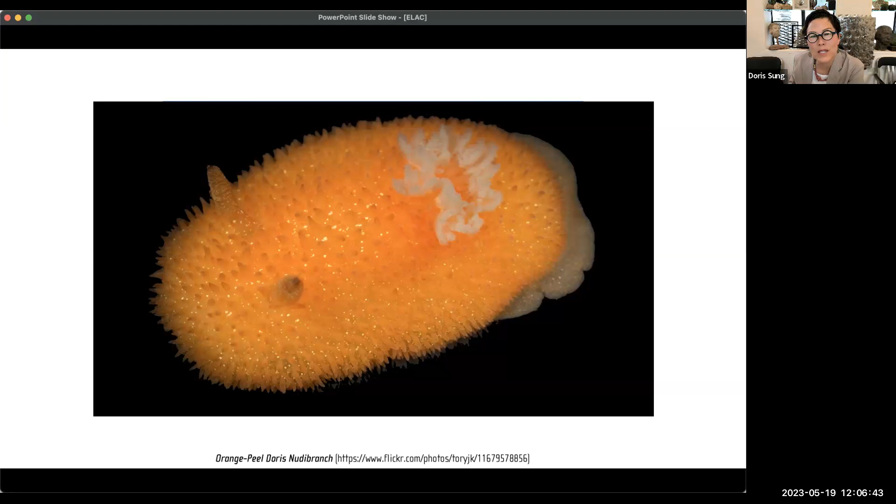So when I was in college, I actually was a biology major. I was very interested in the math and sciences. Enjoyed doing all that kind of stuff about plants and animals and behavior. I also liked to do the arts, and I wanted to be an art major in college, but my father said absolutely not, you cannot do that.

I started to move forward, went to graduate school, started to get really interested. Again, let me back up for a moment. I was going to go to medical school. That was why I was in the sciences. And it was in undergrad that I started to get exposed to architecture and other things. And that's when I decided to change direction and start to look at architecture, because it, in some ways in my mind, was the combination of math, science, and art.

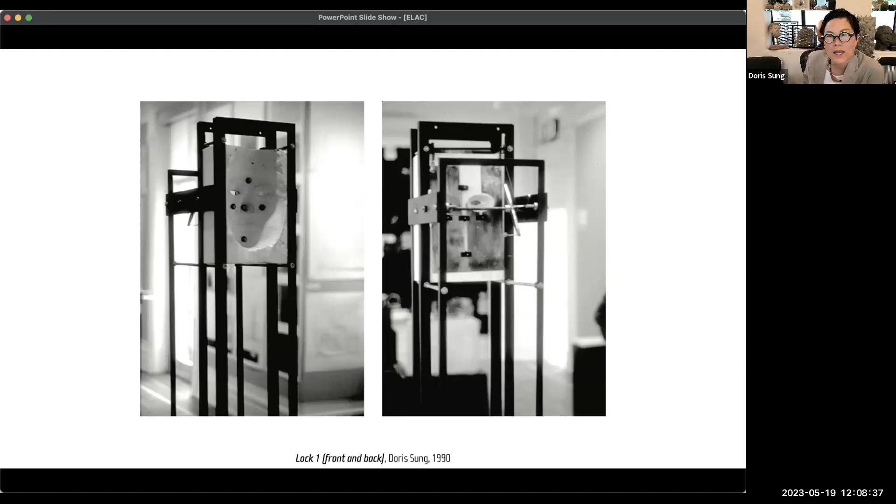And you can actually feel things and sensation through it. And so these are the things that I start to get infatuated with, because architecture too, being made out of inanimate material, should also be that sensitive. So I started to make these objects that try to transfer and understand body movement and material and sensitivity through grad school. And then even after grad school, started to continue to look at the biomorphic, bio-inspired designs. This actually was one that the eyes would flick open and closed and obviously mimic eyelids and that kind of movement.

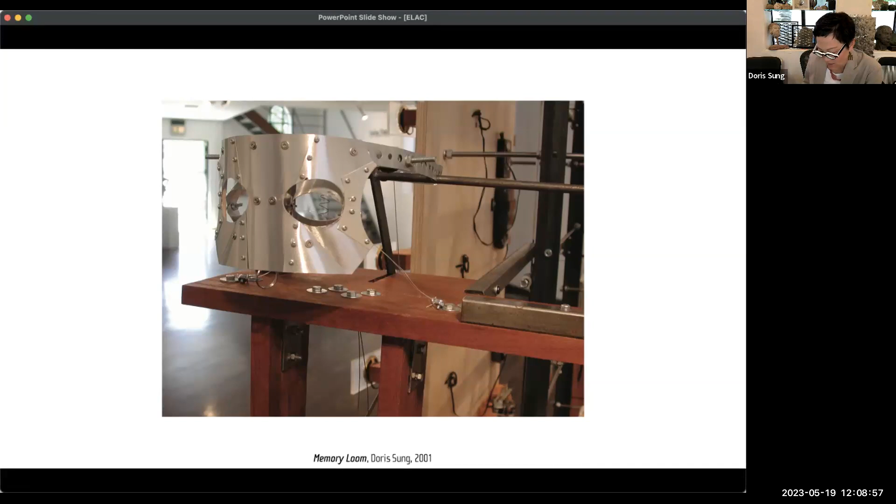I really started to be interested in Maurice Merleau-Ponty's work, The Phenomenology of Perception. He talked a lot about how the experience of absorbing inanimate objects into your body happens not through thinking about it intellectually, but through the experience itself.

He spoke specifically about a blind person's cane, and how through it you can feel texture, depth, and all kinds of things. It becomes absorbed into the body, so much that they're able to feel all kinds of things through the cane.

Over time, you also see things like the infamous Oscar Pistorius, who used blades to run, moving beyond a simple fiberglass stick to something high performing. So much so that other runners with feet thought it was an unfair advantage. So the question is, it's not just a matter of low-level activity for this material, it can actually be at a very high level.

Beyond the material itself is the space around you, that understanding of the bubble. As anyone who drives knows, there's a certain understanding outside your car of what that depth is and how to move your vehicle, maybe less so now with cameras, but prior to that, this is what started to understand that space outside. So can we understand that space outside of architecture as well?

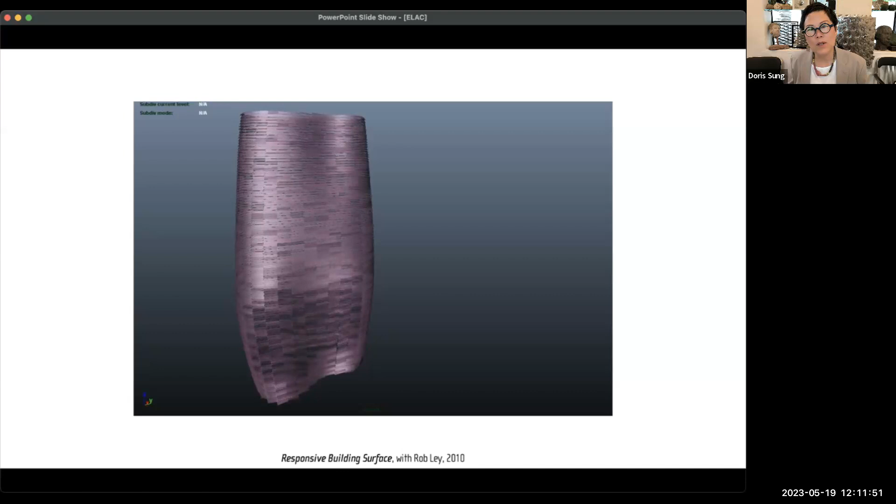So ultimately, I thought architecture should do this too, that it should be responsive to what's going on, especially the environment that is changing all day long. If it's responding properly, the facade on the outside would change depending on where it is. Higher up in the building, you'd have higher winds and different temperatures. Lower, it may change because of cloud coverage or trees blocking it. The change should actually happen throughout the day.

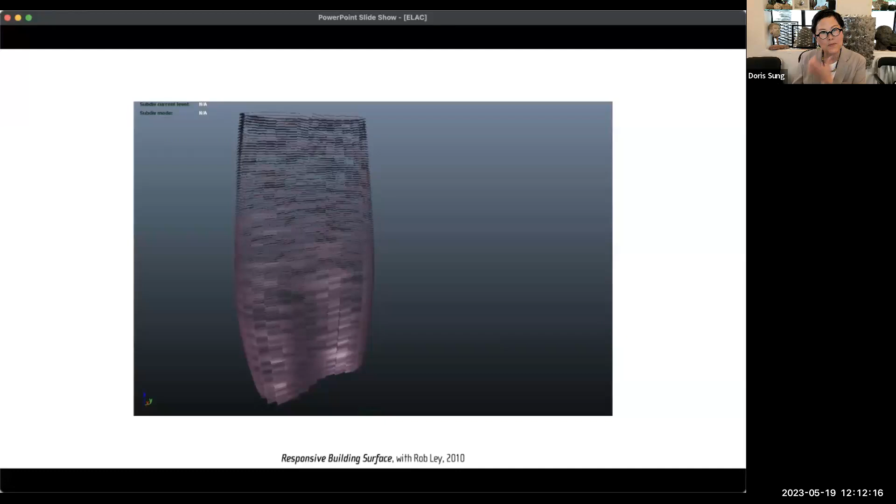At the same time, I became very infatuated with climate change. Elizabeth Kolbert wrote a book on catastrophe and climate change and how it was nearing. She started these essays probably around the year 2000, earlier than the publication of the book, and it really impacted me quite a bit, making me think about how we as architects really have to think about how our buildings are going to adapt.

The quick history: long ago, our buildings had thick walls and small windows. It worked quite well because they worked as insulators. So when it was cold outside, the inside was warm, and vice versa.

And because the windows were so small, it minimized that kind of heat or cold transfer through those surfaces. Moving forward very fast, we have the invention of plate glass and long-spanning steel, and suddenly that heat could come in very quickly and easily, not only through the material of glass, but also through radiation by the sun just coming through. Therefore, we had to invent air conditioning, and air conditioning over time has grown so tremendously that in order for it to perform efficiently, we have to seal off the building.

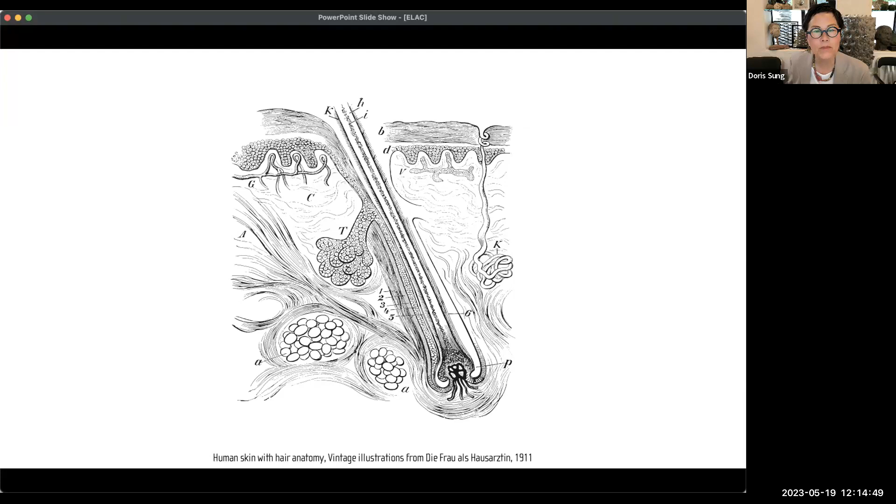I started to then look at smart materials, thinking that if we're going to make something responsive, we have to start with materials that are responsive in itself. Smart materials, different than the use of 'smart' in itself, is actually something that responds to changing conditions in their surroundings, and it requires no energy and no controls. This is obviously very different from what we call smartphones, which is the absolute opposite. But the engineering term for smart actually is this.

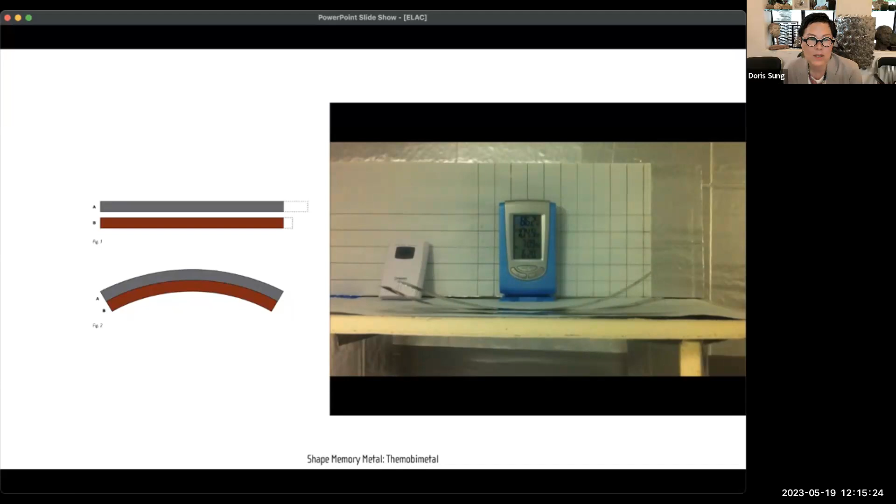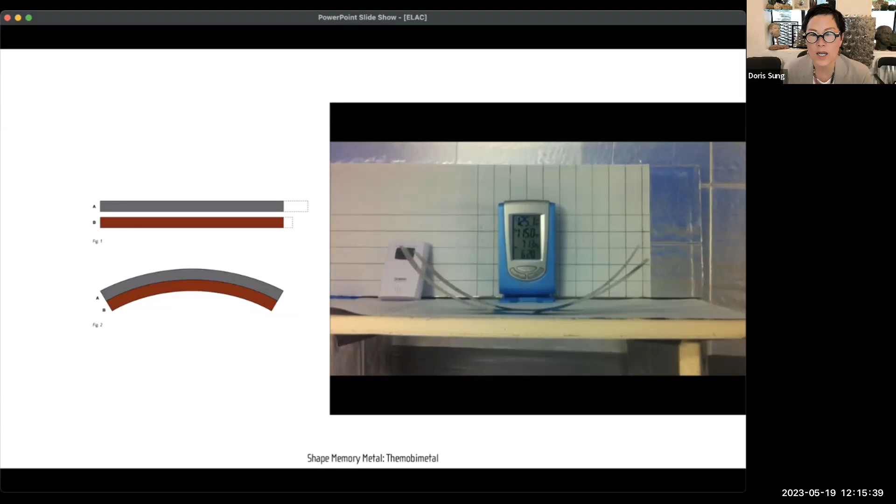And the material that I came upon was thermal bimetal. Thermal bimetal is a material that actually has two different alloys of metal laminated together, and when the temperature goes up, one side expands more than the other—so it has different coefficients of expansion. It will go back and forth millions of times, mainly because they're molecularly bonded together.

So what I'm going to do now is show you some of the projects I've done using that material, and then some of my more recent work at the very end.

As I told you before, my interest in climate and how architecture needs to respond to different things falls into different categories of its operation architecturally. In this case, it's ventilating surfaces—how do you make surfaces so that hot air can actually escape?

This is the first project, from 2009, where we tested the material. The material had never been used in a surface-like condition before. At that time too, I was really consumed with looking at how to make a design from beginning to end using computation.

So the computation was part of the fabrication process. This one actually used a very heavy modeling tool called CATIA, which is the type that eventually became Digital Project for Frank Gehry's office. But in 2009, which I don't think of as that long ago, it took us about 16 hours to instantiate this model—to actually run the model so that the surface was populated by all the different pieces we wanted.

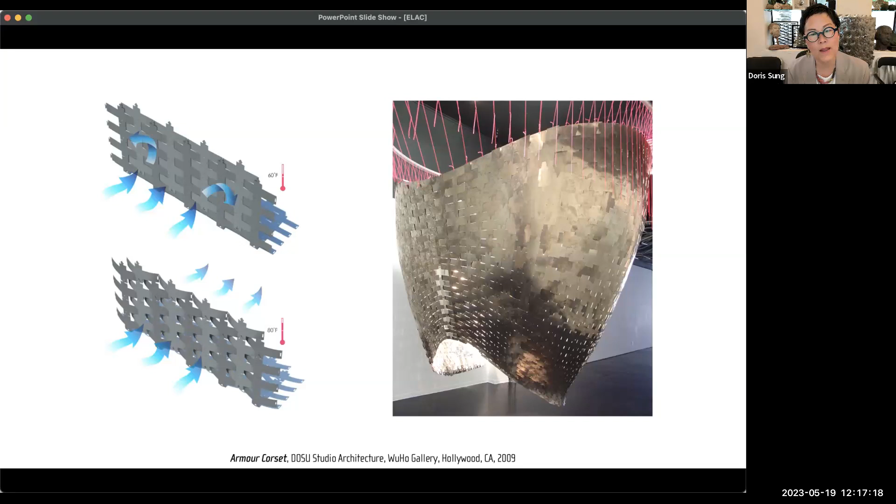Very slow, very heavy. Anyway, the idea was that as the temperature went up, the basket weave would crimp and allow air to actually pass through. We also eliminated any fasteners, trying to eliminate any kind of structure that would block the access of heat to the surface. And the result you can see is this kind of crimping of the surface as it heats up, and it returns when it cools down.

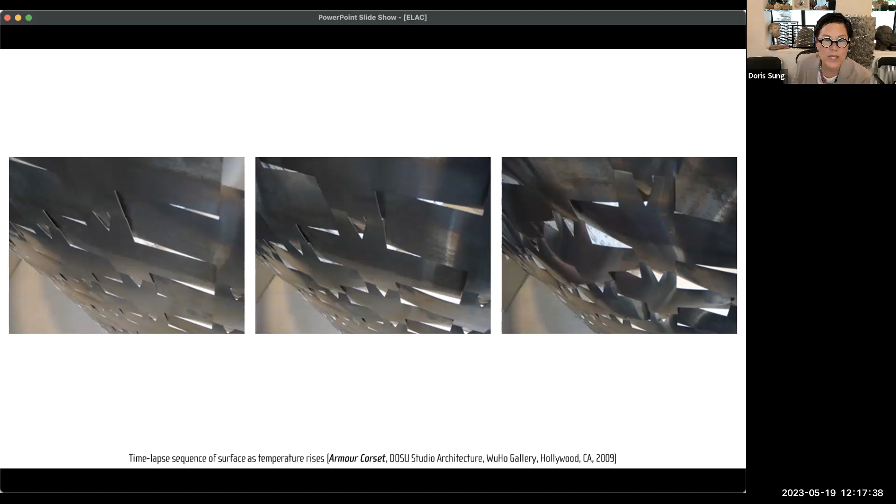That was a big deal for us because we actually did not know what we were going to get—it was the first time I ever used the material. But since then I've done a lot of different things with different thicknesses of the material itself.

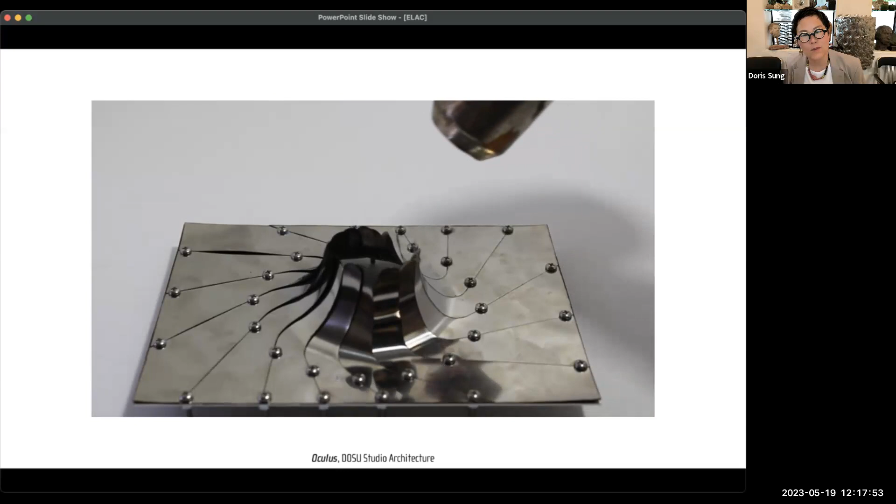Here you can see making an oculus open and close, using that geometry to expand into a larger surface, so there are multiple openings that open and close. A lot of the intent was trying to make surfaces, because architecture is basically made out of huge surfaces. How do we scale up to the scale of architecture, as opposed to always making these things that are really small? So working with geometry has actually helped a lot.

With that ventilating too, started. Again, I'm jumping around with different projects, and these are not necessarily sequential at all. But in this case, I did a project for Toyota Prius.

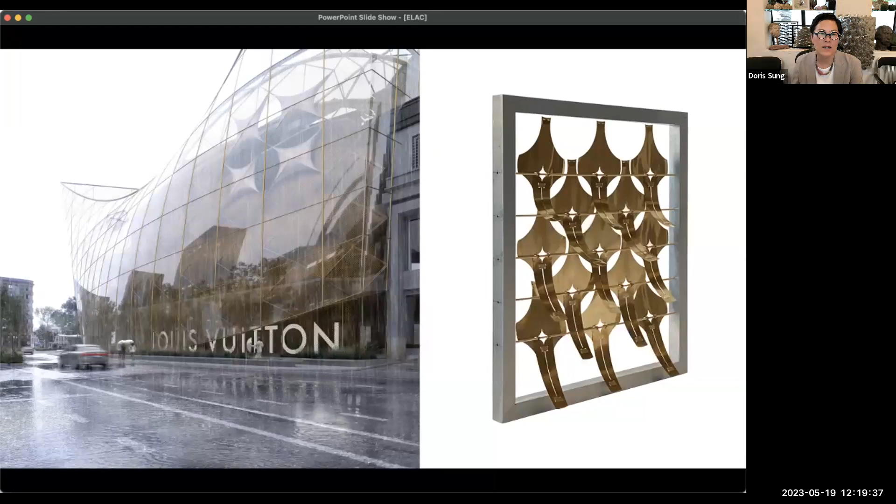You can see here a surface that was going to expose an LED screen behind it. So as the night came out and the pieces start to rotate, you can see through the system, an LED system for advertising in the evening.

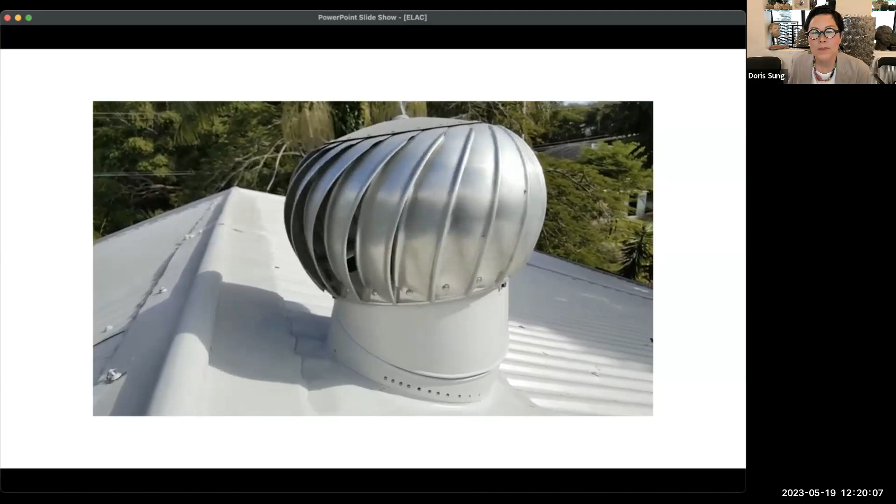Energy generation also was part of what we started to think about, because obviously we're just using the sun one-to-one to make these things happen. In this case, this is a typical ventilator for a rooftop, I'm sure you've all seen. The problem with this ventilator is that in the cold times, it's all open, and cold air can actually go down into those spaces and into the building's interior below.

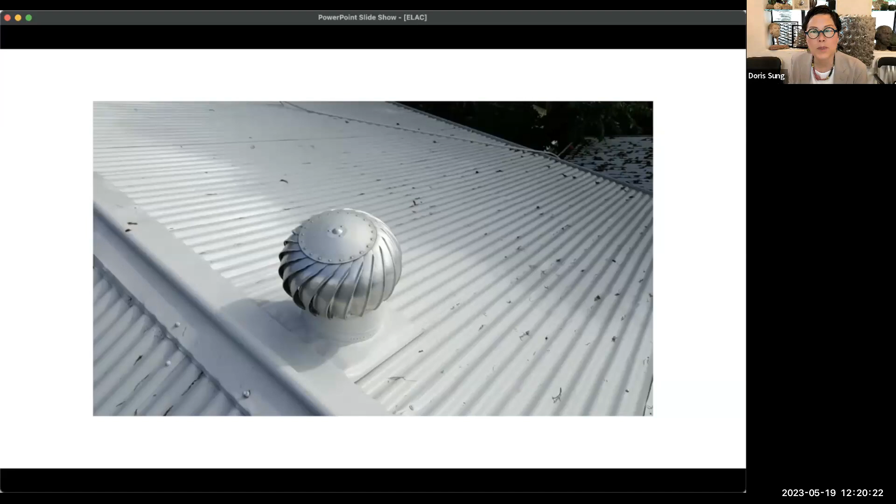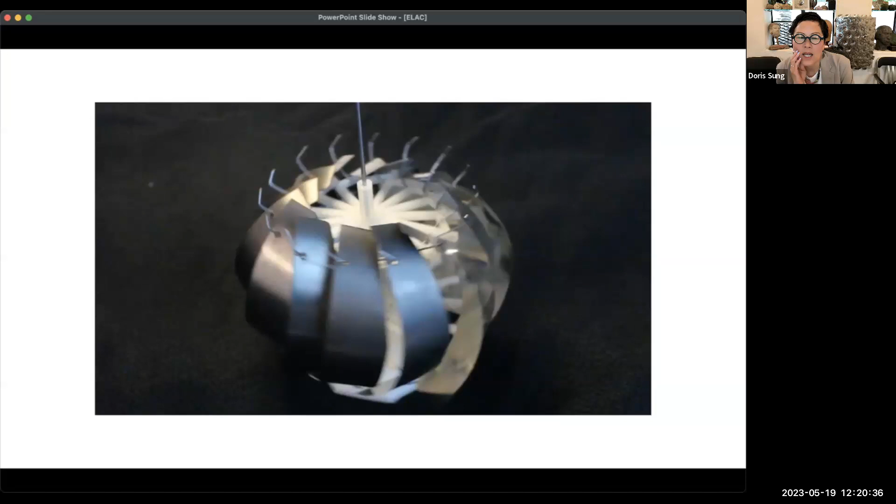In order to prevent that, we started to think about how we can make something that can rotate and activate when it's hot. These pieces get hot, they flip open, they catch the wind, and then when it cools down, they start to close up and reduce those openings, so it could reduce the cold air coming in at the end of the day. So you can see these closing as they go.

The other energy generating example, the heat lamp is acting like the sun. So if we heat one side of the system, it basically spins forever, and we can actually start to generate energy. Now granted, it's very low performing at this point in time, but still a perpetual system.

You can see the number of different types that we went through. I have to say on this project, it's funny because I use a lot of students and have a lot of interns in my office. I now remember two of the students who worked on this over time are both from ELAC, ELAC transfers. They were very, very helpful.

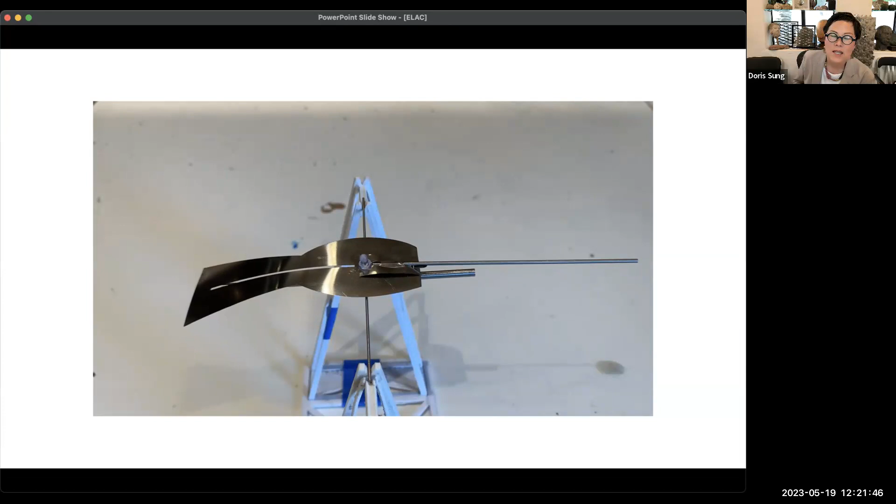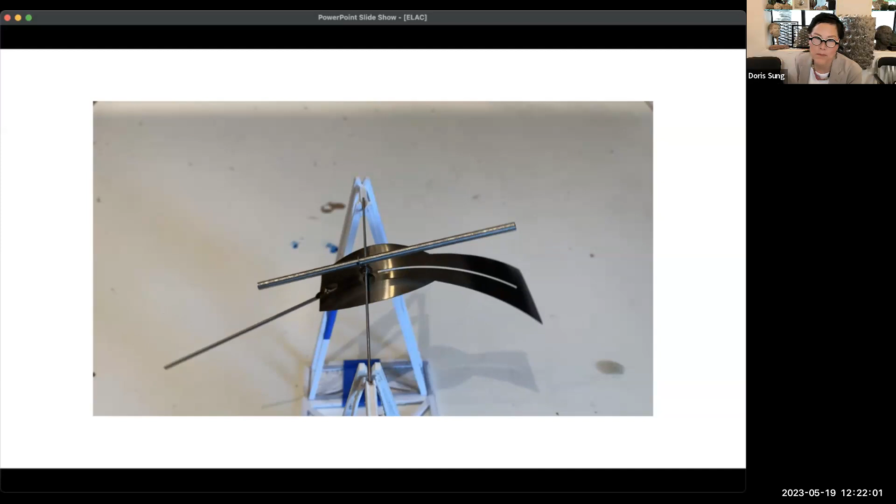This then led to me trying to think of how we can make these things rotate. Now this looks really simple, very crude. It took us a long time to get to this point because we wanted to make a system that would somersault forward. Instead of going forward and then backward to its original position, how can we make something that can actually spin, like that energy generating thing, forward, but in a modulated way.

I know when people see this, it's like, what's the big deal? But it took us weeks to get to this point. I just show this to give you an idea of what it is. Then what we do after that is try to find the most simple way to move forward. How can we even simplify it even more? Because we want to eliminate any extra parts and any extra things to make it manufacturable as well.

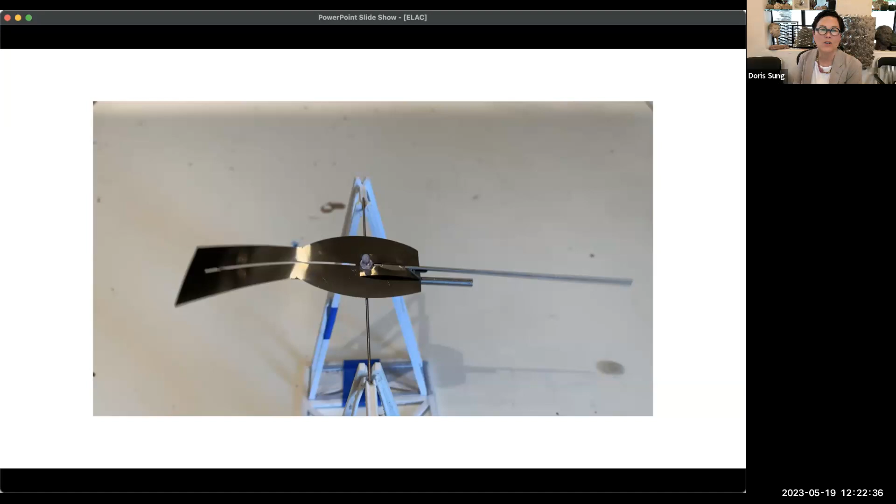Sun shading. This is a project that Ingelo is familiar with because we worked on this together. It was probably 2011 that we worked on this project.

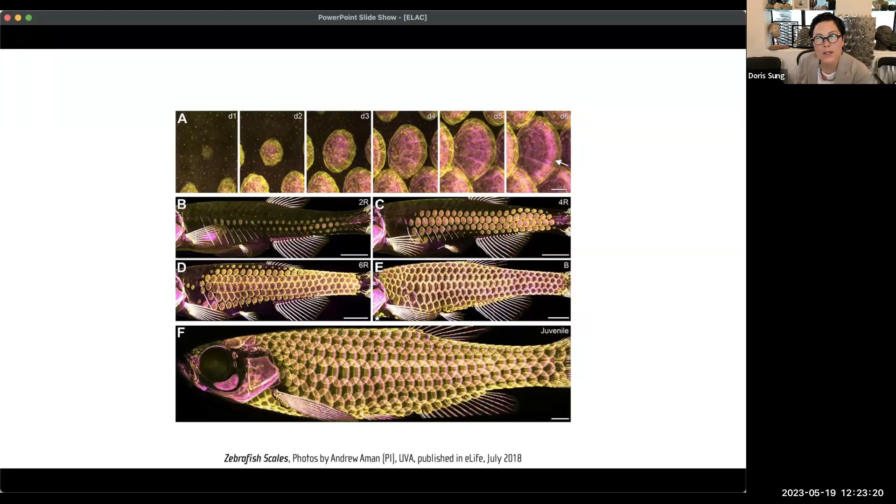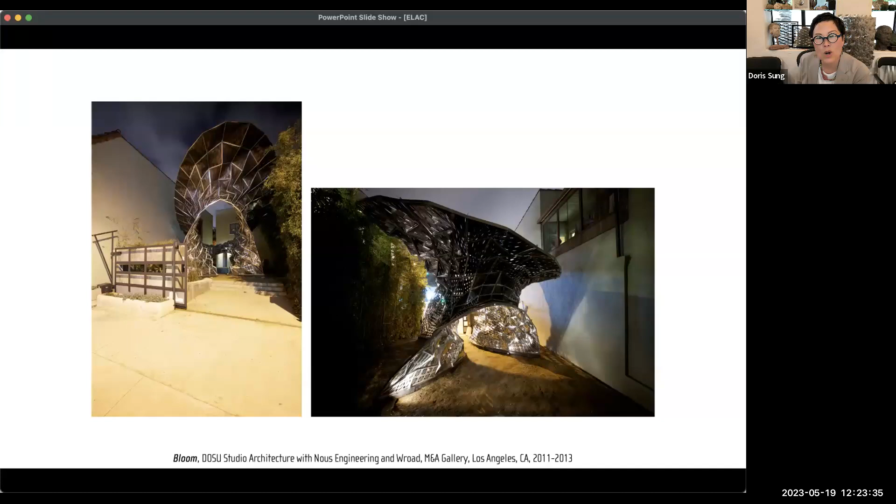We looked at scales of fish and how this kind of parametric surface can actually move across the surface and differentiate. We ended up building this project called Bloom at the Materials and Application Gallery. At that time, it's about 21 feet tall at its highest point, using very innovative structural systems, but the idea was basically how can we use that movement to increase shade or increase ventilation.

This is when we used both the CATIA model as well as the Grasshopper modeling. At that time, Grasshopper was just starting up, so it didn't have a lot of capability, and we didn't have a lot of faith in it either. That's why we ran the CATIA model in the office, so we had two different competing factions.

There was a point in time that we actually flipped over and finally decided to use Grasshopper. We were able to help Grasshopper, the company, develop their product so that it can go from design all the way to fabrication as a result of it.

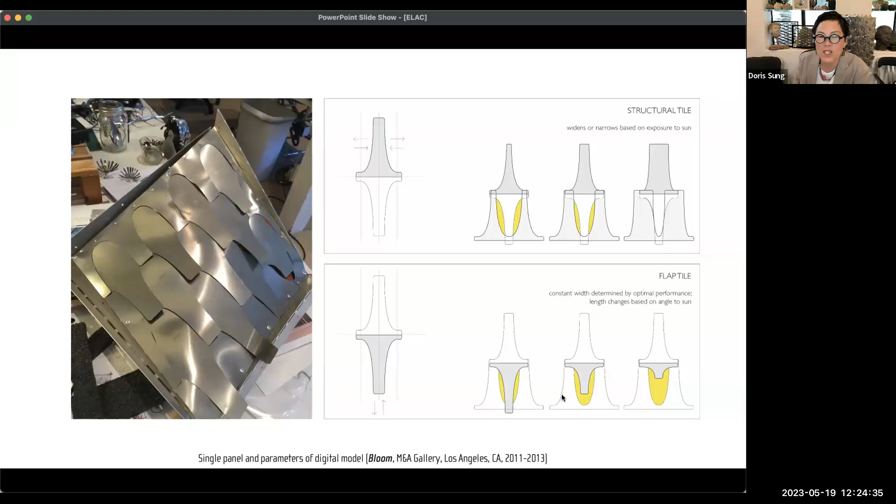The idea here is that the top portion can actually be very narrow depending on where it was, and then the tail on the bottom side can change in length. What we did was we connected it to different types of analysis models.

The tails are very short and almost transparent in some areas, and very long in the areas that actually saw the sun.

This led to other ideas. I started to look at assembly strategies using this material too, and how we could consider how it affects assembly. When designing that project Bloom, we had about 14,000 unique pieces.

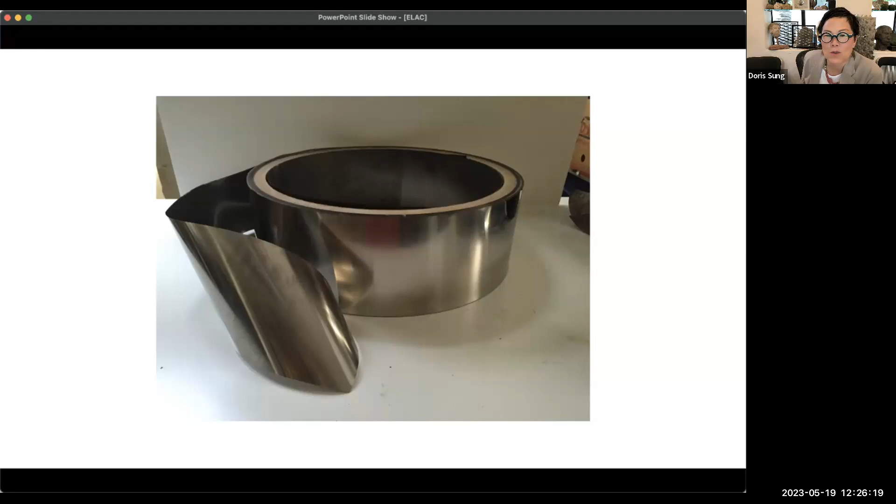After 14,000 pieces, I decided it's just so hard to keep track of that many. I wanted to make a project about one piece and not even worry about that. So that was this project—here's the material that comes in these rolls, and I wanted to make a project that basically used the rolls and wound up on itself.

A lot of the projects that I do, I try to eliminate fasteners and use more tab and insert systems together, so that assembly is very easy and requires no skill—even someone like me can put it together.

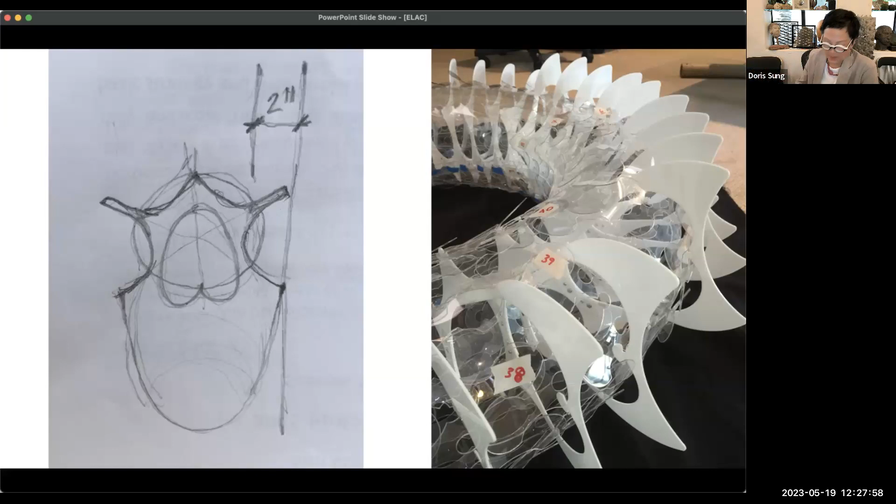You can see the different models. I show this just to give you an idea of how we go about doing this and how the idea comes together.

The one that started on the left was first, but we made this and it was very floppy. We realized we needed structure, so we moved to plastics. You can actually see inside, this is a completely internal structure. It worked well.

Had trouble seeing it because it was plastic and your eyes just go cross-eyed, so we used coffee stirrers with little tape to understand the pattern actually coming out of it. On the right, we moved to a combination of clear plastic and opaque so we could see a little more.

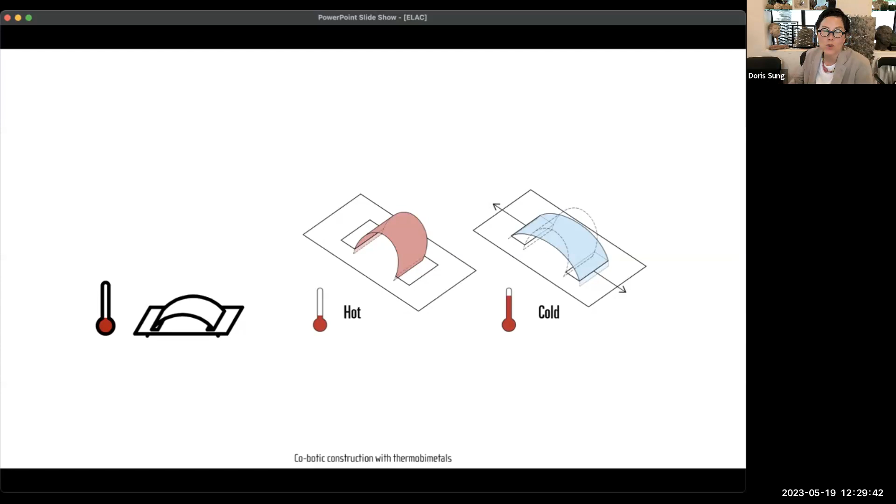In this case, the material we use is much thicker. It's very difficult to bend mechanically or manually, so heat at about 300 degrees helps us make this. It's basically a one-hand, one-person installation.

You could see the gloved hand, you do need a glove because it's hot. Inserting it there, and as it cools, it fixes into position and is ready for the next one to be installed.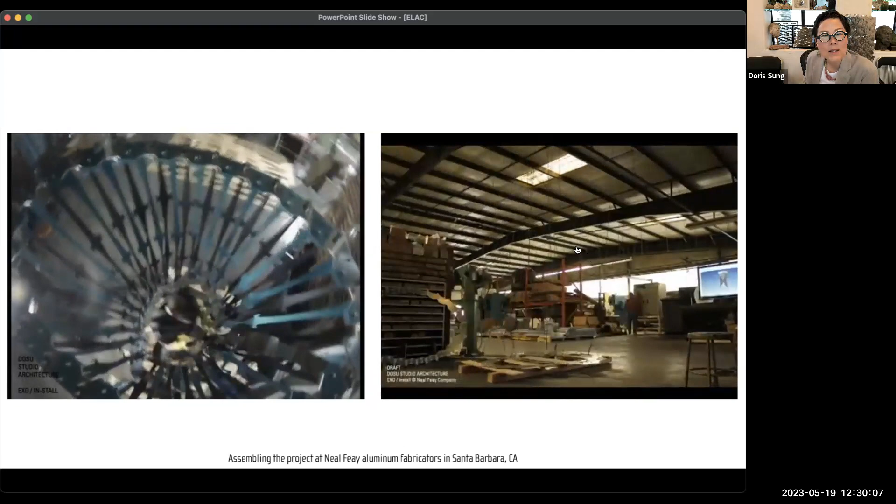You can see on the left, the person in the middle, the silver pieces are the bimetal, the colored pieces are aluminum. That oven you can see in the distant back is where we heated the pieces and brought them back and forth to the person in the middle.

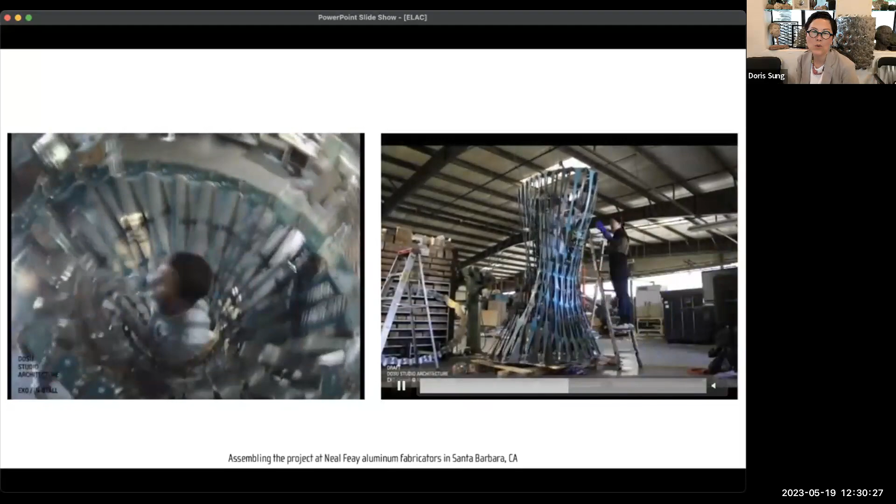Assembled it probably in about 6 hours. You can see in the video on the right, the floppy pieces of aluminum start to stiffen up nicely as we finish putting in the last pieces of bimetal in the middle.

In this case, we finished it, but like we make mistakes on every one of our installations. The mistake we made here is we didn't think about how to get the person out of the middle once we finished. That was a little problematic, but we ended up using a lot of pulleys to pulley him out. We got him out.

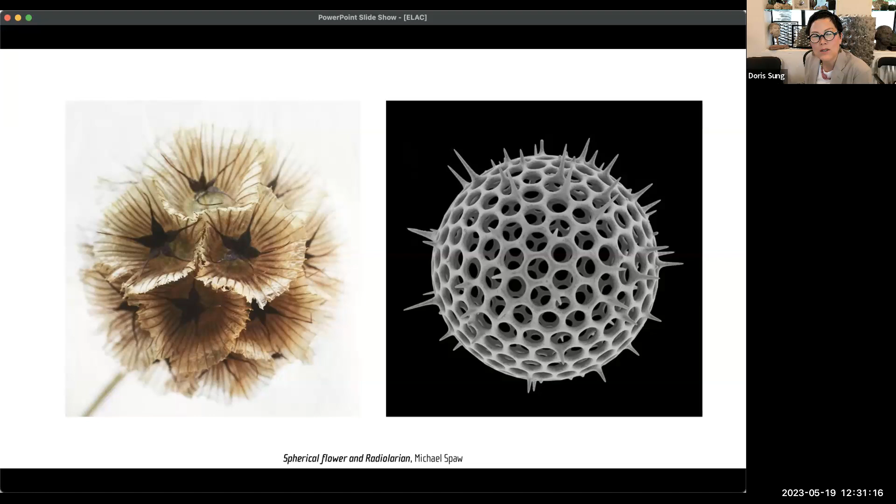We built the bottom of a 5-tier tower. We're in the process of making the upper tiers as we go forward. We used that same technology and idea to make a surface that was 3-way instead of 2-way like the previous one. We looked at nature, as we always do, for inspiration of how and what we build.

The petals, some people ask me, where'd you get your aesthetics? It's so feminine looking, which I actually found a little offensive because it was not meant necessarily to do that, although it might. But like in nature, the petals in this case were designed to hook onto each other so that the thing basically would not explode. So they're actually completely functional.

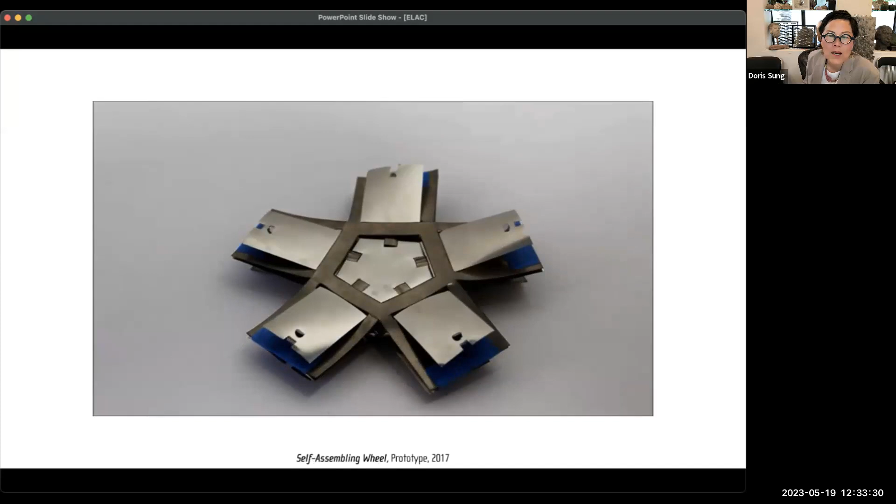It's fun, we get a lot of calls about this. I haven't developed it that much further, except that right now we're trying to make this flat pack self-assembling toy vehicle. This is a wheel as part of it, you can see it actually goes into the bubble. We've made boxes, and some other shapes too that work.

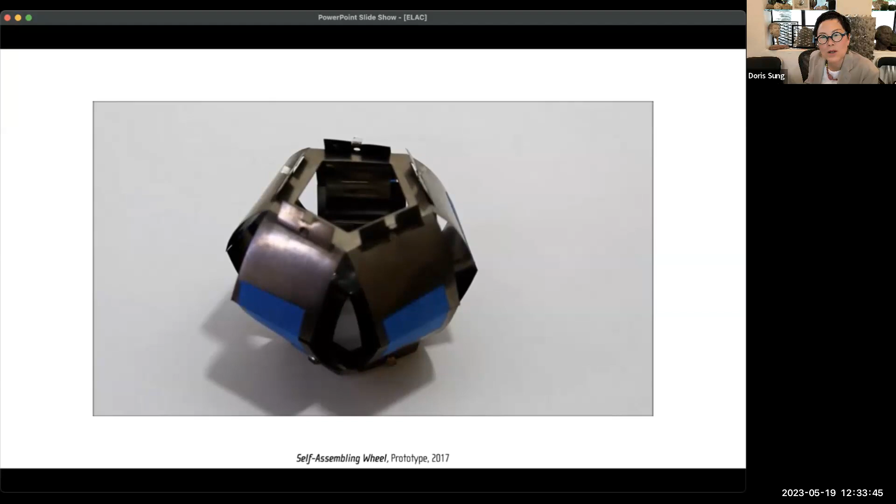Now I'm going to talk about the window system. I show this because, again, my intent as an architect is to try to get all this to market somehow, to try to change architecture, as I mentioned before. And so this is the closest way that we've gotten, and which is really quite exciting.

Just to review, you all know about the energy problem. Buildings use up about 40% of all energy in the US, more than transportation and industry. And within the building, the HVAC system - heating, ventilating, air conditioning - uses up about 45%. Because of these energy uses, I tried to think of ways to reduce that energy. If we could bring it down 1%, 5%, anything, that would be huge relative to energy use, considering how much is used across the US.

Air conditioning is a problem because of the heat island effect. As cities get hotter and hotter, people use more and more air conditioning. And in order for air conditioning to work, to cool the interiors of buildings, it has to expel hot air into the atmosphere. So the hotter it gets in these cities, the more air conditioning is contributing to the problem. So how do we get out of this and not contribute to that heat island effect?

Just to give you an idea of energy use too, 12% of all energy in the US is used for air conditioning alone - that's not even including heating. You can see in both the commercial sector as well as residential, although it's differentiated, it is a problem all around.

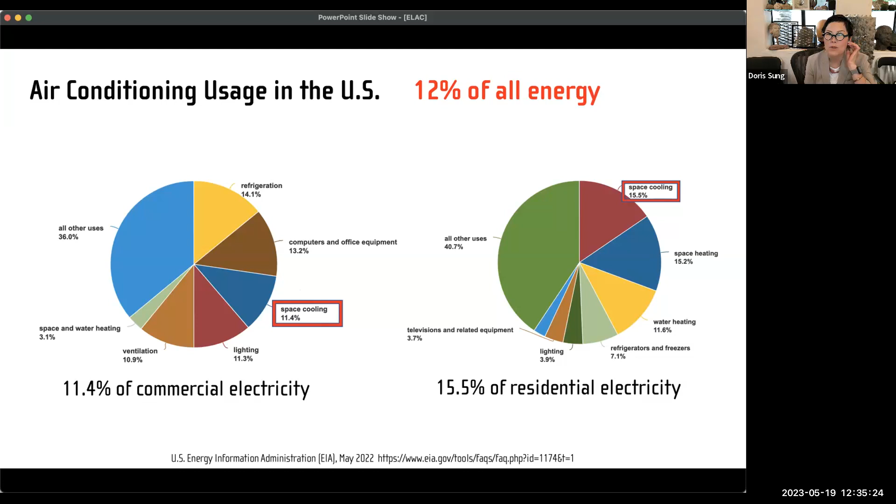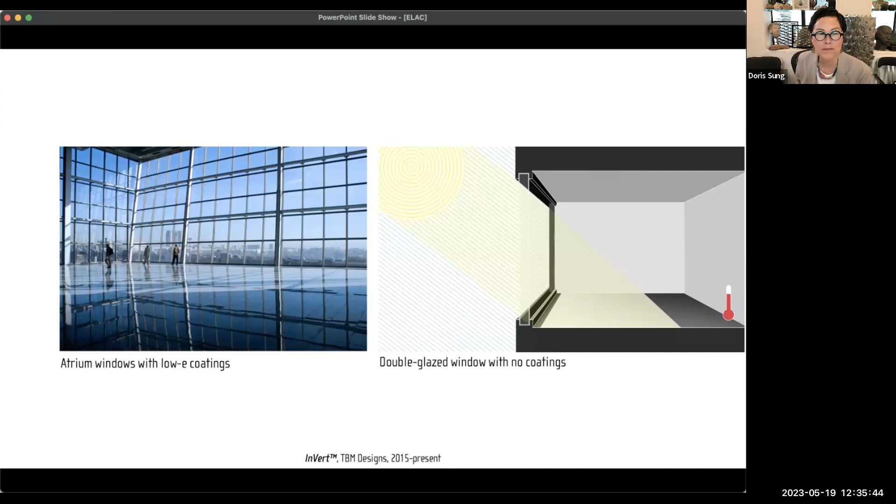So here's the windows that everybody likes - everybody wants that beautiful view, 360 degrees if you can have it, floor to ceiling. But the reality is, without coatings, it's going to be a lot of heat gain coming in. With low-E coatings, you can control that heat gain, but the problem ultimately is a wellness issue - it's like wearing dark sunglasses all day long. That's what they're learning from this. It's cheap, it works, but it's not really what you think.

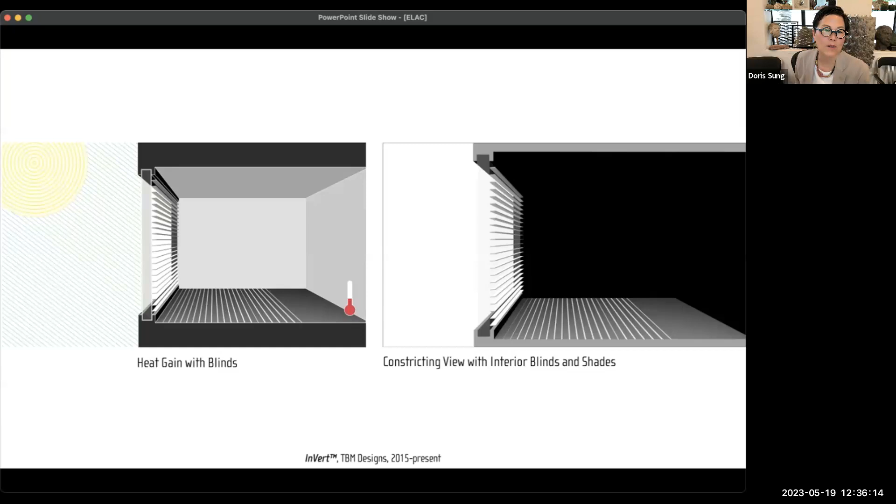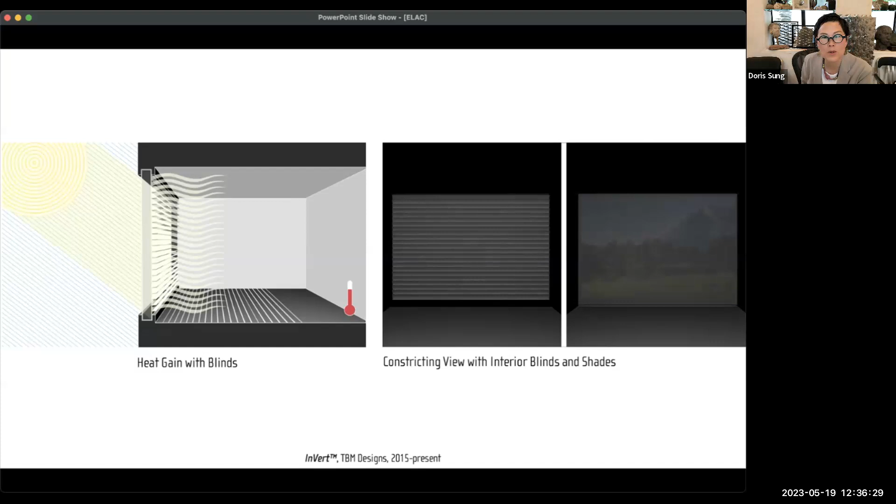Electrochromic glass, where you can control it, requires a lot of electricity and wiring for you to be able to turn that on and off. It's very, very expensive and oftentimes has a color tone to it. Heat gain we still have with blinds - once the heat comes in, the blinds actually don't help at all. What it does is help with glare, not with heat gain. And obviously it constricts the view in any case. Oftentimes people don't control them regularly, so they have to be automated.

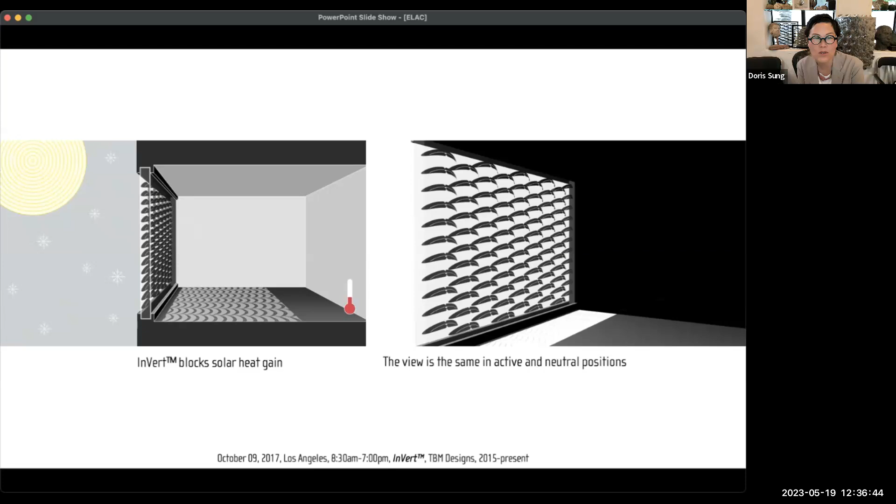So the window I designed is put into the cavity of a standard IGU, or standard double glazed window system. You can see here, as the sun hits the surface, it actually flips over. The good thing is that in neutral position or active position, you don't lose visibility whatsoever - it just works by itself. Up close, these are the little bimetal petals that flip over when the sun hits them. They do so very independently and don't require any energy to do so.

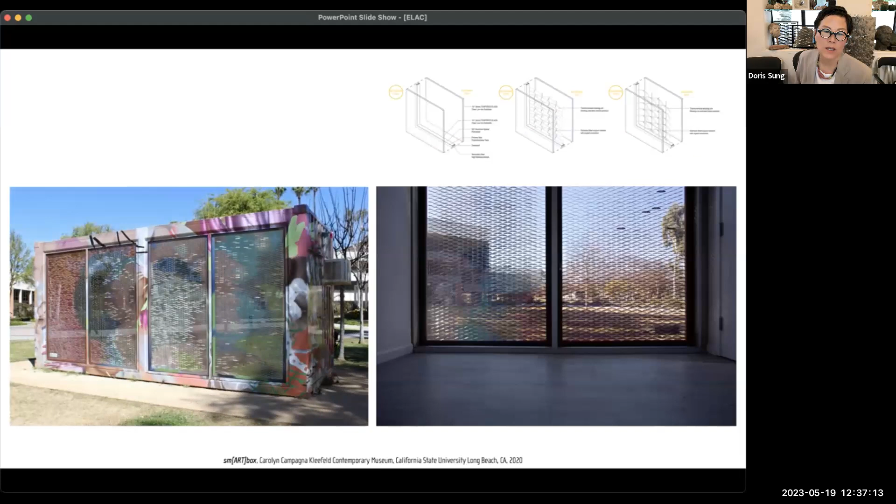We have some installations here in Hawthorne, California. Another one we just removed actually just a couple weeks ago from the Long Beach campus. You can see the pieces flipping over from the outside on the left, and then on the inside, the shading that it actually provides throughout the day.

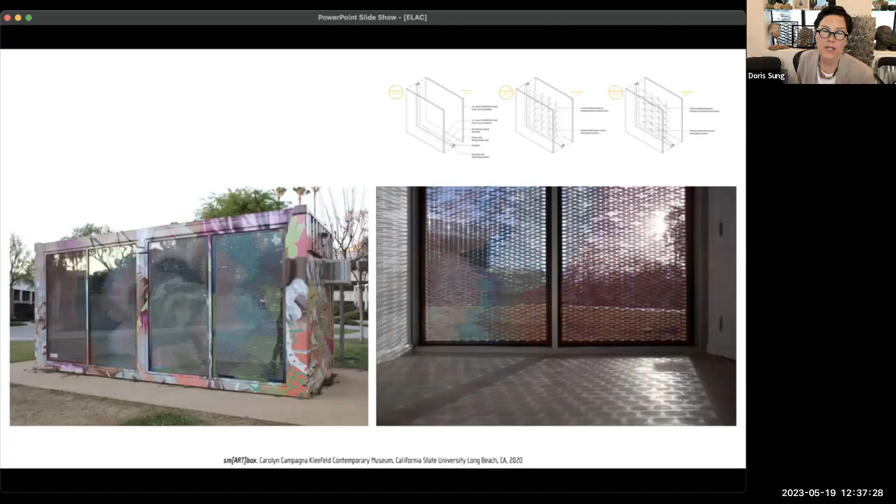So it's exciting because this material is now commercially available. We have a lot of recognition, all kinds of things, including the Cooper Hewitt National Design Award.

The last thing I'm going to show now is stuff on public health that I've been working on more recently. It's not using bimetal, but something that I feel can make an even bigger and greater impact in architecture.

One of the projects we're working on with a big team of experts is smog eating panels, mainly because a lot of pedestrians are the ones waiting outside breathing this type of air. How can we reduce lung disease in basically the urban poor?

We're using passive systems too, because I'm not interested in using a lot of electricity. I'm not interested in cleaning 100% of the smog, but how can we do this passively? If we do things passively, things will still get better. We use a little chimney effect.

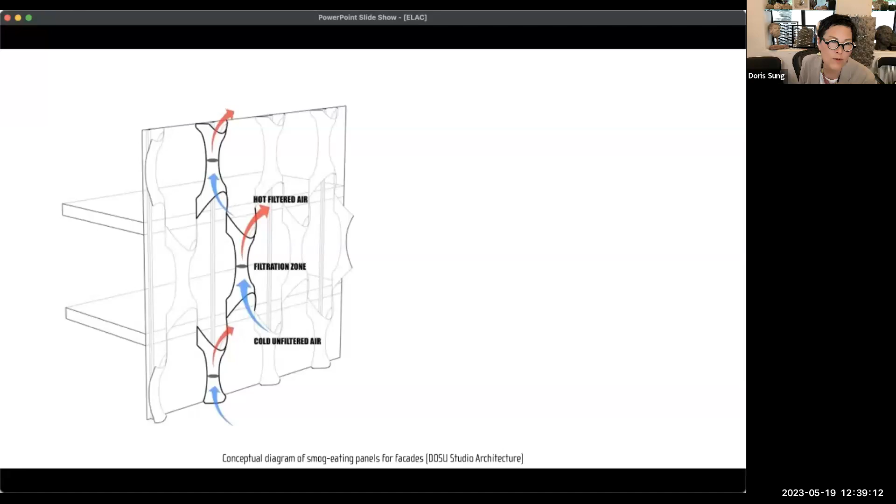Using primary sources of wind, using plunger effect from buses running through urban canyons, we're able to move air through these little tubes. You can see here we're starting to develop some of those surfaces, working with aerospace engineers.

I was nervous about approaching aerospace engineers because at first I thought we just have to use civil engineers. The problem with civil engineering I found is they pretty regularly don't think out of the box of what basic structure is, especially for architecture.

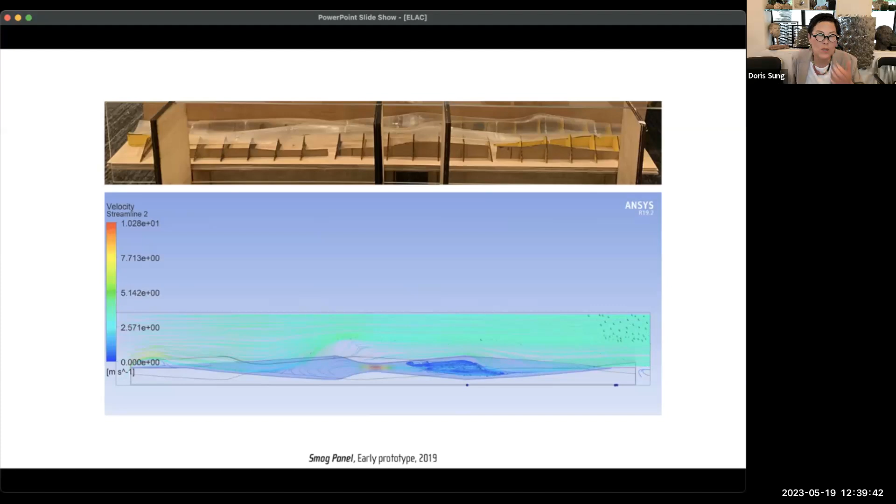So when I approached these aerospace engineers, they thought this was the most radical project they'd ever seen, because they typically work with wind speeds like Mach speeds for airplanes. They were super excited this airflow was so slow that they could possibly do something to control wind speeds. It was actually really quite exciting.

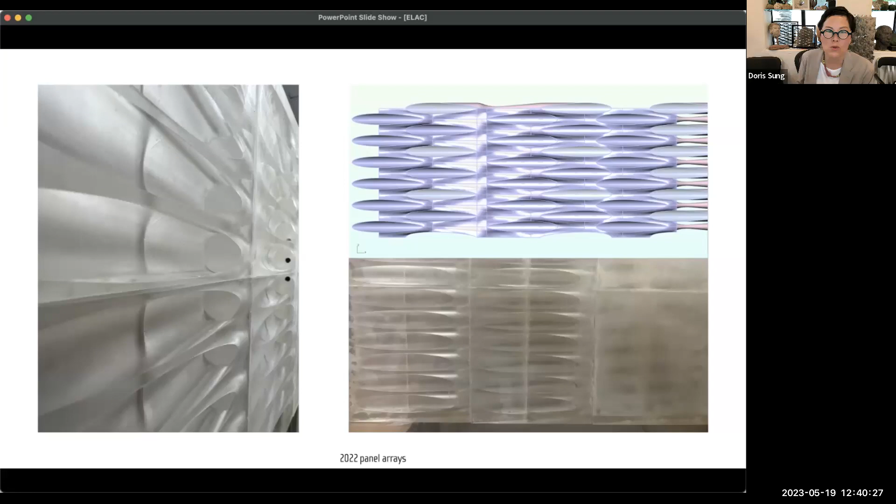We continue working with them. You can see some of the development, some of the tubes and how we're moving air through them. We're now looking at the filtration system—carbon, titanium dioxide, all types of things—thinking about 3D printing that could be done in any country, anywhere in the world, so it becomes more open source, using local materials.

The goal is to eventually design architectural panels in a rain screen situation to filter that air, and also a bus shelter system, so that people waiting for buses, who end up breathing some of the worst smog, actually have the freshest air in the city. We're now trying to work with automobile companies so they can fund these types of shelters too.

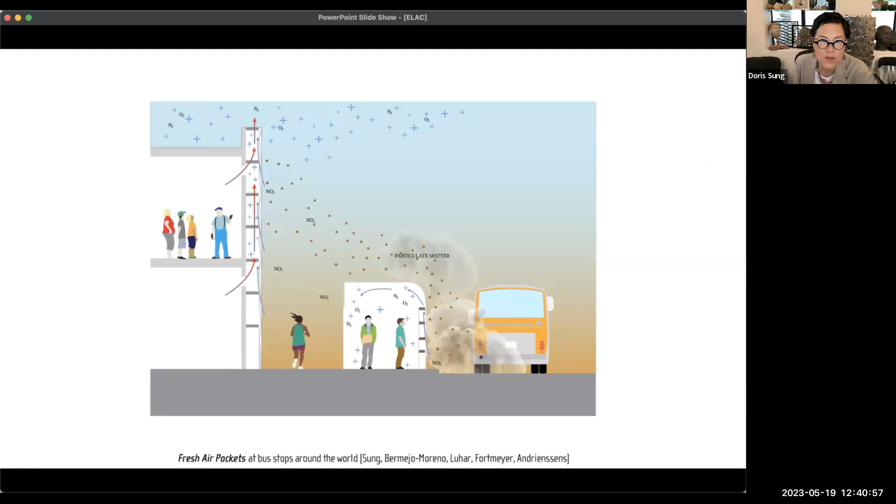The last thing I'll show you is some of the stuff that came out of the robotics we do. Here you can see very fun little robots that we make in my office. We did these for fun—I never thought they would amount to anything. As we started making these, and this one kind of rolls, we started to name them. They bring joy to our life. They roll, they scooch, they hop, they do all different types of things. Our interns—I started this as an exercise for them to understand the material, but we've amassed a collection that are super fun.

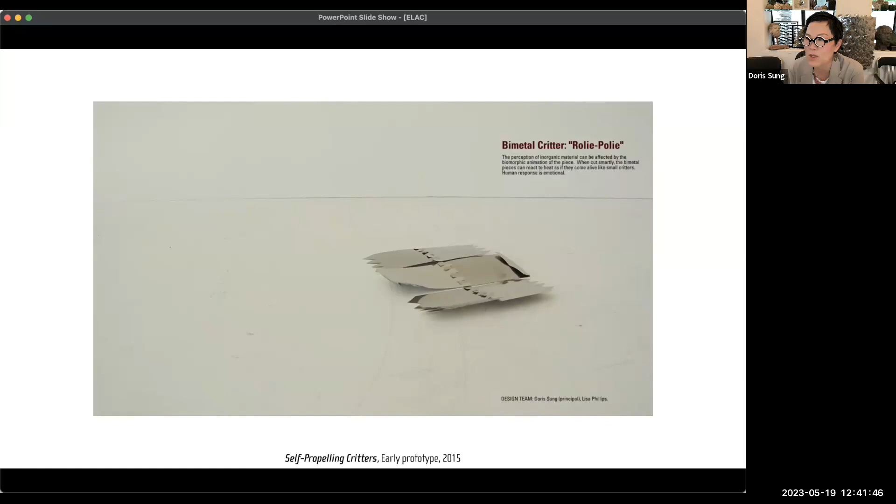I never thought it would actually influence architecture, but I noticed everybody always smiles when they see it. So I thought, if that's the case, why can't we make architecture that will make people smile? The idea was that if we make one person smile—100, 1,000, 10,000 a day—we can actually improve the mental health of a city. Even if we can make 2 seconds better for everyone, there are studies showing endorphins increase happiness.

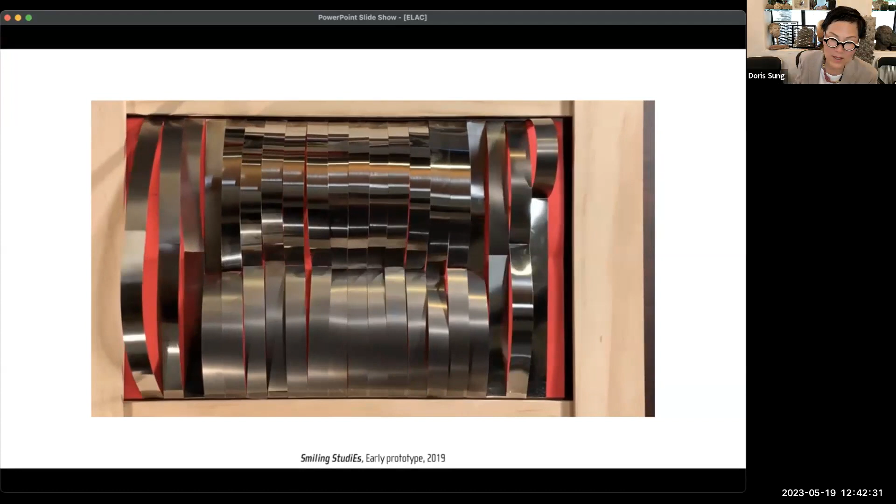So we started to look at that, working with interns again, thinking about what is going to make people happy, starting to work with psychologists and sociologists on how that can actually work. We did some crude things that actually smiled at you, but started to learn it's probably not the smile itself that makes someone smile—because you won't smile at a video of someone smiling at you. We're starting to learn it's actually the movement system itself that's quirky.

And the best thing about it for me is that it's the imperfect movement that is making people smile or laugh, as opposed to the perfect movement. So instead of being perfectly engineered and everything lined up perfectly, it's those inaccurate moments that actually do it. So we're really good at those inaccurate moments and not making them line up.